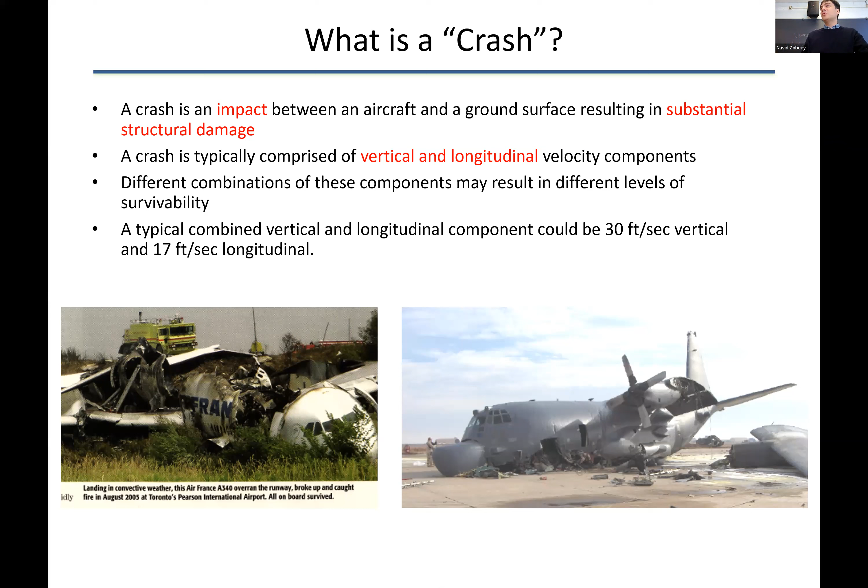So with that in mind, with the limitations that we're going to impose on the requirement, let's go through this. Any questions so far? Is it clear?

Okay, so there are 4 things that we have to guarantee. First of all, it's a system design, it's not about the material only. There are passengers, there are seats, there are cargoes, there is the entire system that we are designing for, and each of them would significantly change the behavior of the aircraft. So keep in mind, it's a system process.

In simulations, we simulate it like that. In testing, we test it like that. We have dummies and we have seats. So it's not just about composites and the fuselage, it's about everything.

And then we have to guarantee 4 things. First of all, retention of mass. It's not like we're gonna lose half of the aircraft and the other half is gonna survive. No, the mass has to survive within a threshold, number 1.

Second, you have to maintain a path for the passengers to exit the aircraft. So, for example, if the passenger floor collapses, it's not acceptable because then there's no path for the passengers to exit. So we have to make sure that floor beams survive.

Third, the survivable volume. So if the fuselage deforms significantly, it's not acceptable. Again, all of those things are for that very limited force we're going to apply: 30 feet per second vertical speed, 17 feet per second horizontal speed. So it's not a major load, but it is considerable.

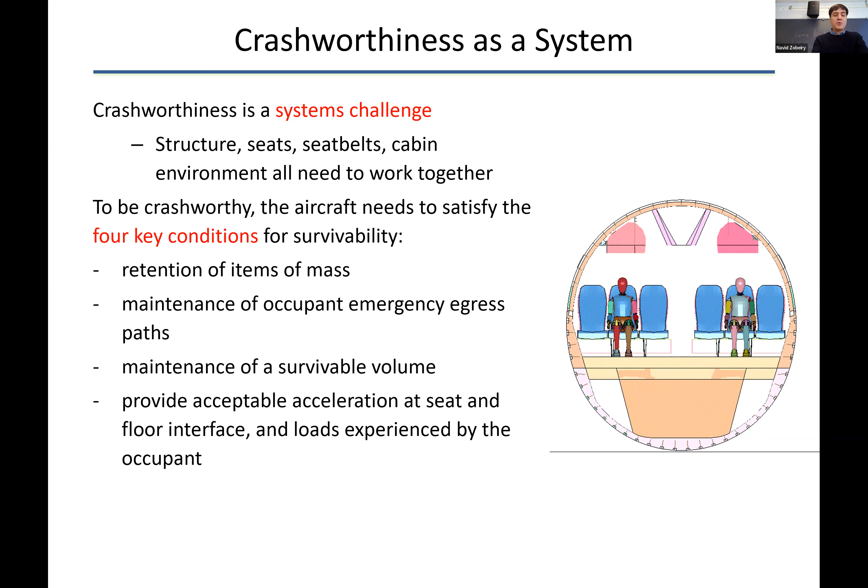So what are the limitations on a passenger? I'm going to talk about G-force, and then there's a force as well. When we feel positive G-force, that's like an aircraft accelerating, and we feel positive G-force. The blood goes toward our legs, and our brain might feel a bit dizzy, and then there's blackout if there's significant G-force.

Normal passengers, normal people like us, I think beyond 2G is a lot for us. We can handle maybe 2.5G, but not beyond that. Normal people, pilots, they can go to 9G if they have suits and training and all those things. But even beyond that, it's not acceptable.

Negative G is quite different. Negative G is when you, let's say, descend quite fast, and then all the blood goes to your head, and this causes redout, they call it. So the blood actually comes to your eyes and you can't see. I think there's a much lower limit, maybe 2G or 3G, even for pilots, trained pilots.

So negative G is quite bad. Positive G is still acceptable, or maybe with the suits, they can go beyond 2, 3G. But for commercial aircraft, so this is not like fighter jets, the passengers shouldn't experience those G limits.

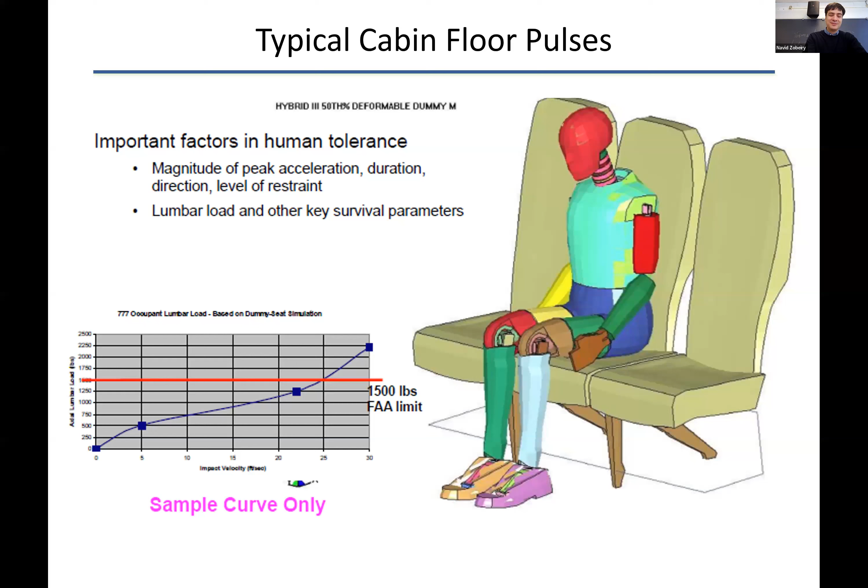The whole idea is to come up with a design to maximize the energy absorption of composites. Otherwise, they're not going to be good at absorbing the energy of the crash. So the subfloor survives for the cargo and the passengers, but you have sacrificial parts whose job is to absorb the energy of the impact. You know how much energy you have because you're designing it to 30 feet per second. It's not going to survive beyond that, but at least it's going to absorb some of the energy.

So what is the design? When the impact happens, you want these frames to rotate inward, and then the sinusoidal shaped components rotate inward as well and become vertical during the crash, so they can absorb the energy much better.

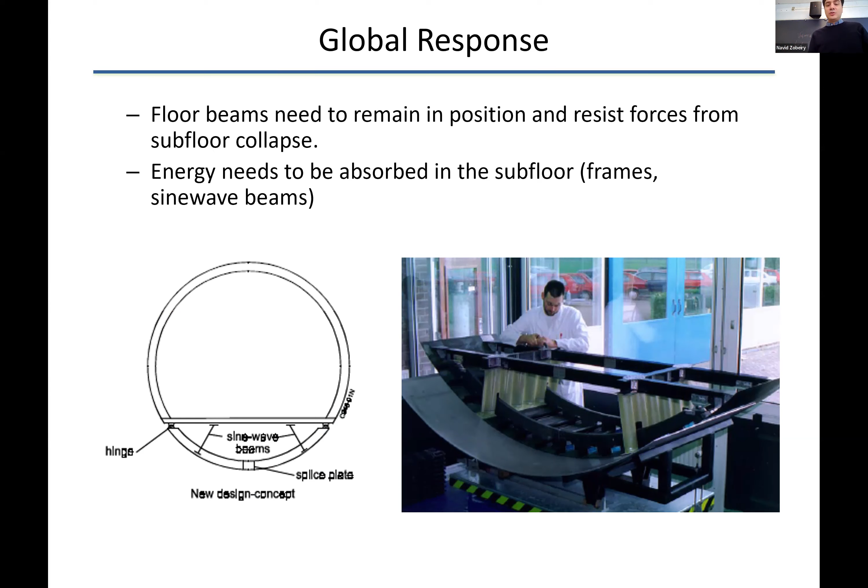You do that by designing this splice plate, which is going to fail in tension. It's an intentional weak point in the design - you know if a crash happens, it's going to fail. It's not going to fail in any other case, but the load of the crash would be enough to fail that splice, and then the beam bends inward after that.

Then you have these sinusoidal shaped components that are designed to maximize energy absorption, and the shape has a significant impact - we're going to talk about that. Is this clear so far?

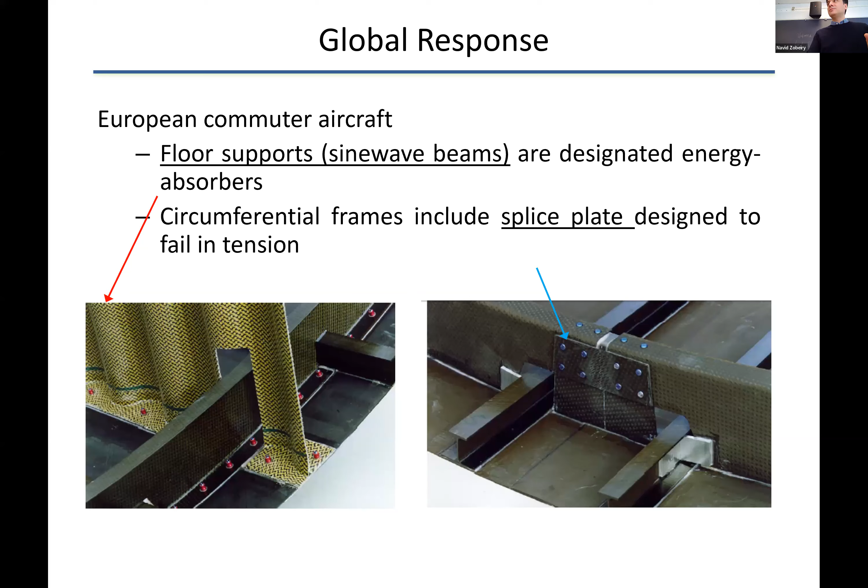I think this shows the scenario here. Again, you do this with cargo, maybe without cargo, so you have to consider different scenarios. Here is the passenger floor, and this is the cargo floor with the beams. You can see how the lower parts bend inward, and this one has multiple crash absorption components.

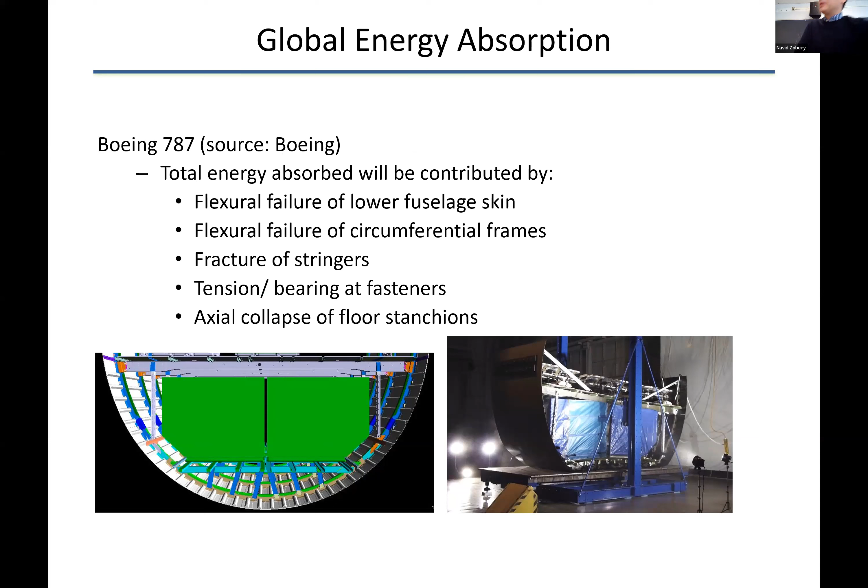If you have an aluminum tube, let's say a rectangular tube - for aluminum it doesn't matter that much, but rectangular becomes important for composites - and you start crushing it. The way you do tests is you secure it vertically, then drop a huge weight from, say, 10 meters or 15 meters or 5 meters, and that sets the energy of the impact.

If you're designing it properly, if this doesn't buckle—because it might buckle, and if it buckles, that's a different story, it's not going to absorb energy—if it doesn't buckle, it's going to create local plastic hinges. And then it will go through this and create multiple plastic hinges. Plastic hinge means it's absorbing energy.

Because basically, if you look at the stress strain curve, it goes through that yielding process, and the area below a stress strain curve becomes the amount of energy per volume that you're absorbing. So that's where you can take advantage of the material behavior. If it goes through yielding, better. Multiple of these you have, even better.

So a case like this is the best case scenario that you might have for a metallic tube. If you don't design it properly, it's gonna buckle. Then it only has one plastic hinge, and it's not maximizing the performance of that tube. So that's the idea behind metallic structures.

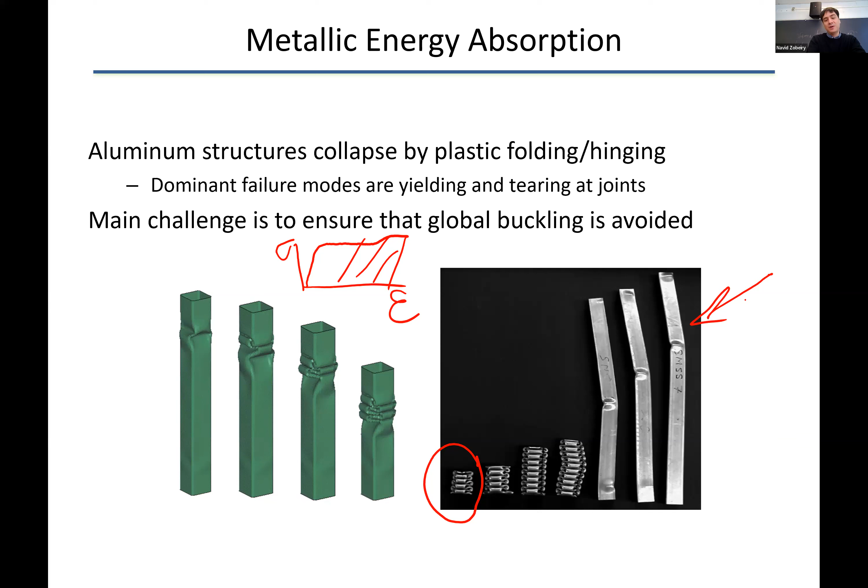So in the best case scenario, imagine that you're taking every fiber, and during crushing, you're breaking it over and over again. So you have a fiber that breaks—it doesn't buckle, it breaks under compression over and over again. That absorbs tons of energy. But sometimes the design is such that it doesn't do that.

I forgot the name of this failure mechanism. There's a name for this type of failure mechanism. Does anyone know? I forgot. Anyway, so it's a different amount of failure, as you can see, energy-wise.

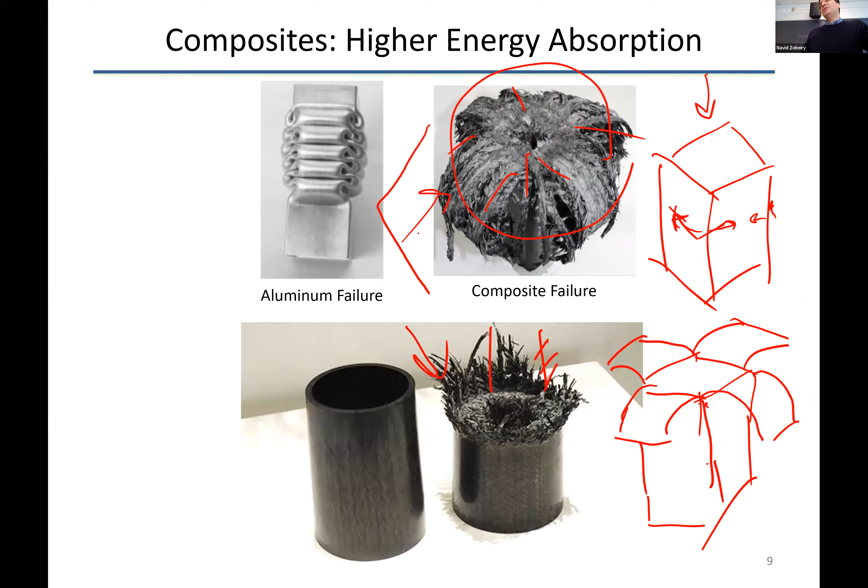So the main thing that we measure—it's a very messy process, as you can see. I mean, how do you measure this? When I was a PhD student, we had to simulate this, and it's a nightmare to simulate something like this, right? So there is one parameter that you look for in the performance of any component.

That is called specific energy absorption. You do a test, you plot force versus displacement, and then the area below the curve becomes how much energy was absorbed, and then you divide it by the mass that was crushed. So it's energy absorbed per unit mass of crushed material, kilojoules per kilogram, for example.

So first of all, if you're comparing aluminum and steel with composites, you're dividing it by mass, so the density of composite is lower, so it's to their advantage. But kilogram to kilogram, which one is better? Because for flying, it's better to have lighter components that absorb energy more.

So if you have a metallic component like steel, and we're talking about circular, it can absorb 10 to 17 kilojoules per kilogram. And again, steel is quite heavy. If you replace it with aluminum, you will increase it to 15 to 25 kilojoules per kilogram. If you have short fiber composites, so not long fibers, chopped short fibers, it's pretty low—probably comparable to aluminum.

But this is where it gets quite interesting. If you have composites with long fibers parallel to the crushing load, then they can absorb a lot more energy compared to metals, right?

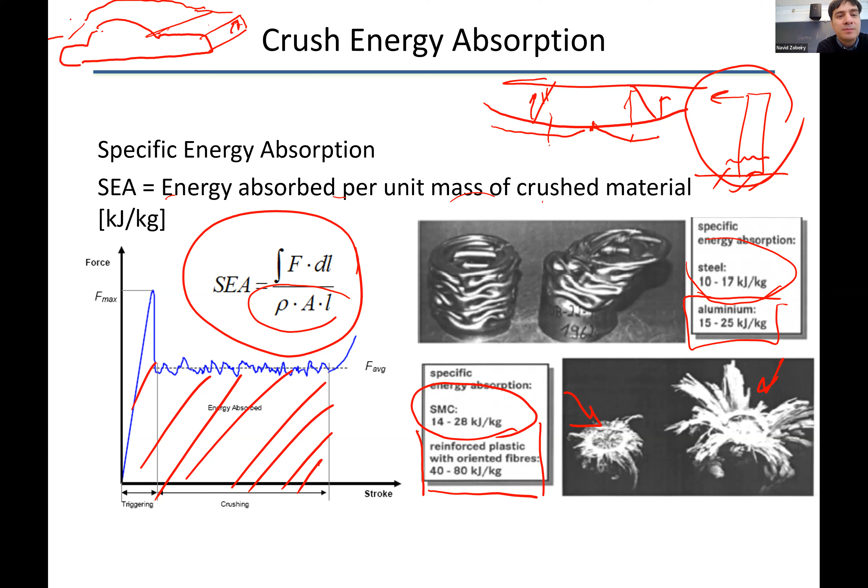So about ten years ago, everyone started doing research on creating crushing components for the automotive industry. Excuse my drawing, but let's say this is a car—let's look at the design here. The idea was to install these tubes, two of them, and in a crash scenario those tubes would absorb a lot of energy.

So for a front impact, this would protect the passengers. The problem is, how do you know the load comes exactly parallel to those tubes? It might come from another direction, and suddenly they don't absorb much energy. I remember at that time we were doing projects with Honda, Toyota, Ford—everyone was spending millions of dollars to design proper tubes because they wanted to reduce the weight of the car. That was before electrification and Tesla and all of those things.

After ten years, they realized it might not work because you never know which direction the load comes from. So in newer designs they replaced it back with aluminum, from what I can see. We are not using composites to absorb impact energy in the automotive industry at the moment. But for aerospace, yes, we do this—we just have to design it so the components align themselves with the crash.

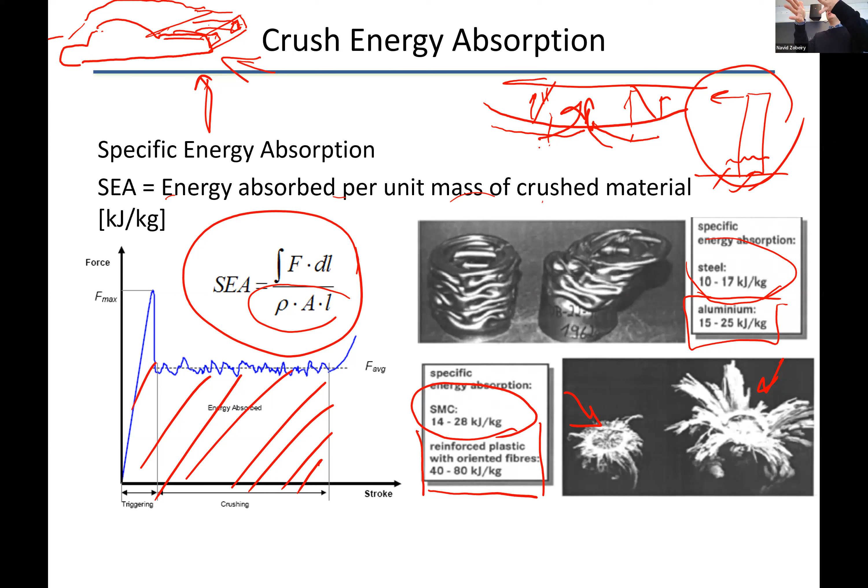Then people started doing a lot of tests—many done by Professor Dan Adams at the University of Utah. He tested different shapes of these tubes. And it's not just the shape; how you do the tests matters a lot too, including the boundary conditions.

People also realized that flat top surfaces versus tapered edges have a huge impact. I don't know if you can see it, but it's tapered at the edge. Without these tapered ends, it might become difficult to get good measurements.

There are lots of details in the testing, but they realized that changing the design changes the energy absorption capability significantly. With a tube, the energy absorbed is around 40 kilojoules per kilogram—still much higher than aluminum or steel. With a corner design, one corner still fails in tension and the other component starts bending, but it's still better than a plain tube, increasing the energy to around 50 to 60.

The best case scenario is a shape like this, which has no sharp corner to break, so everything goes to bending and you start crushing the whole structure. This can increase the energy absorbed to around 80 kilojoules per kilogram. So the design has a significant impact on how much energy you can absorb.

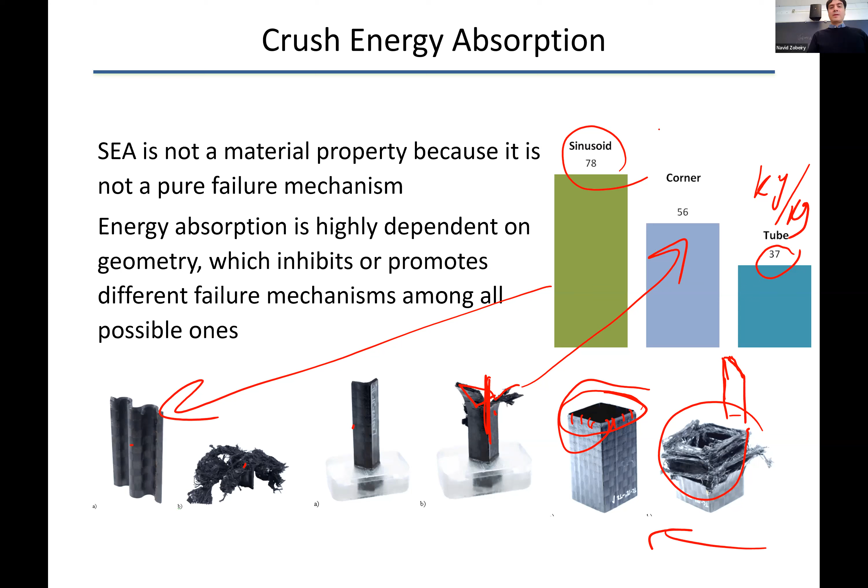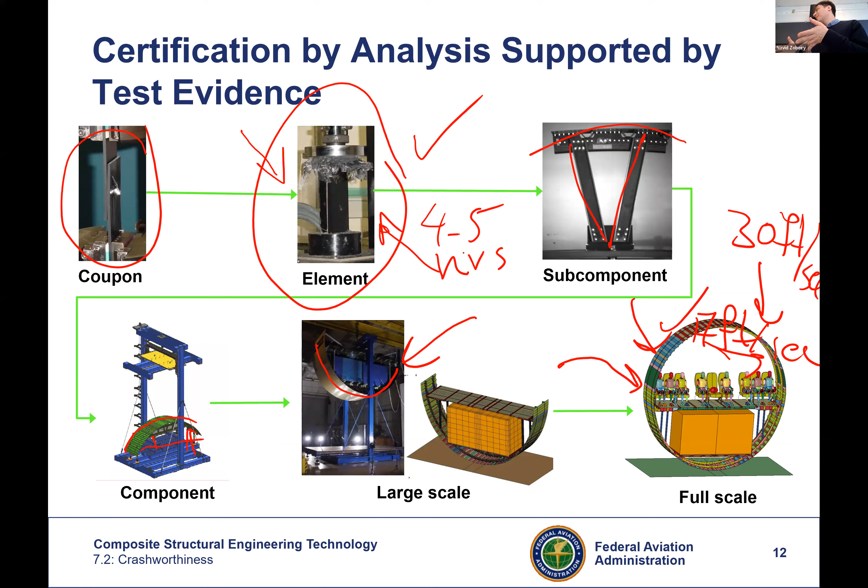So you rely on something called explicit simulation. Explicit simulation goes to extremely tiny time scales, 10 to the minus 6 seconds, 10 to the minus 7 seconds, and does Newtonian calculation at that scale, then adds to the next time step. It becomes an extremely long process to simulate, and the shorter the time scale, the more accurate it becomes.

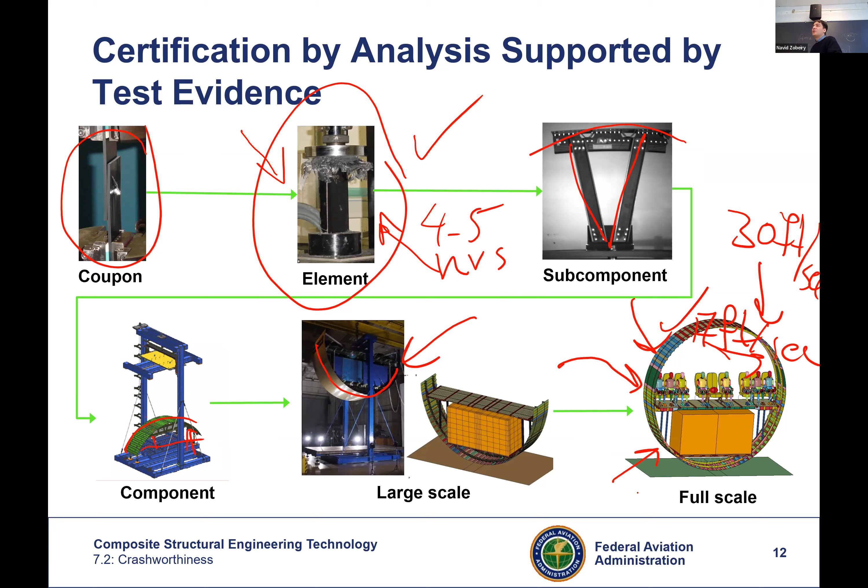So it works, let's say, for 4 to 5 hours. If you want to simulate this thing using that method, it's just going to be months before you get any simulation results. So it might be cheaper just to do tests at that point.

So people have developed different approaches. You can see one of them here, which they call macro elements. You put these beams together, which isn't exactly like the real structure - it's more like a representation of it. That helps you understand the behavior of an actual aircraft.

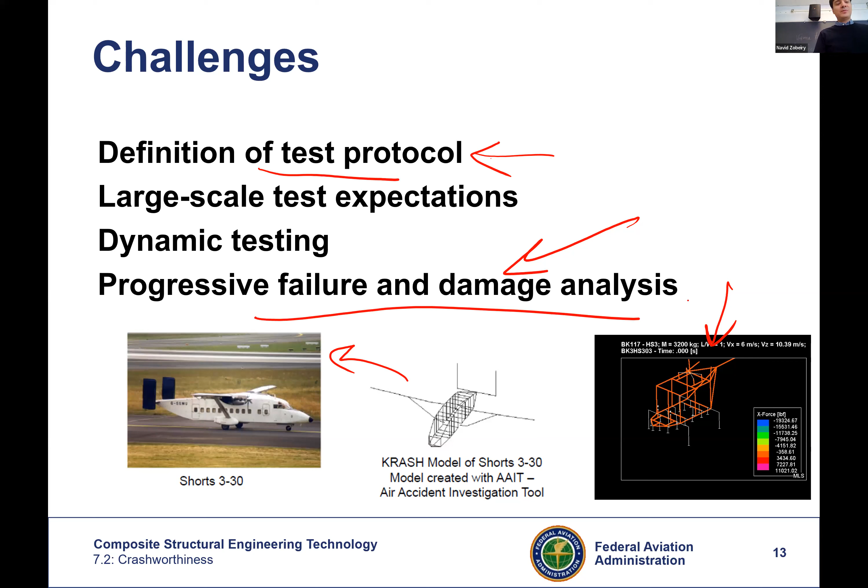But there is a problem - what are the problems? Testing at larger scale is very difficult, and simulation is also very difficult. So at larger scale, we have challenges for both test and simulation, which adds more complexity to the certification problem.

Okay, let's move on to fire safety.

So first of all, there is this viewpoint that composites are not safe compared to metals in a fire scenario. What are the fire scenarios? In-flight fire, post-crash fire, or the gas tank fire. So there are 3 scenarios, and you have to design the aircraft for all 3. That's a true assumption if you're not careful with the design.

But since that perception exists, the FAA has gone the other way. It says that in all of these things, you have to show that your design is better than an aluminum design. So that's this extra safety factor. So God forbid, in the case of fire, it's actually safer to be inside a composite aircraft than a metallic aircraft, just because of that extra safety factor that the FAA mandates designers to show. So how do we show them? Let's go through some of the details.

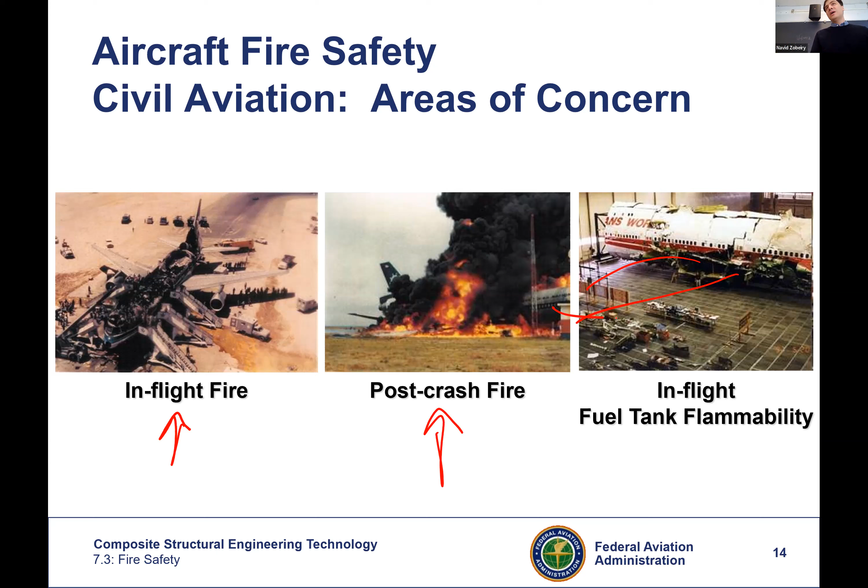For each of these 3 fires: for in-flight fire, you have to prevent propagation of the fire. For post-crash fire, you have to have enough time for passengers to leave the aircraft, around 1 minute. So you have to show that the aircraft's structure survives the fire, and that 1 minute lets the passengers leave. You show that typically through simulation. And then reduced vapor flammability, that's the other thing you have to show for the wing.

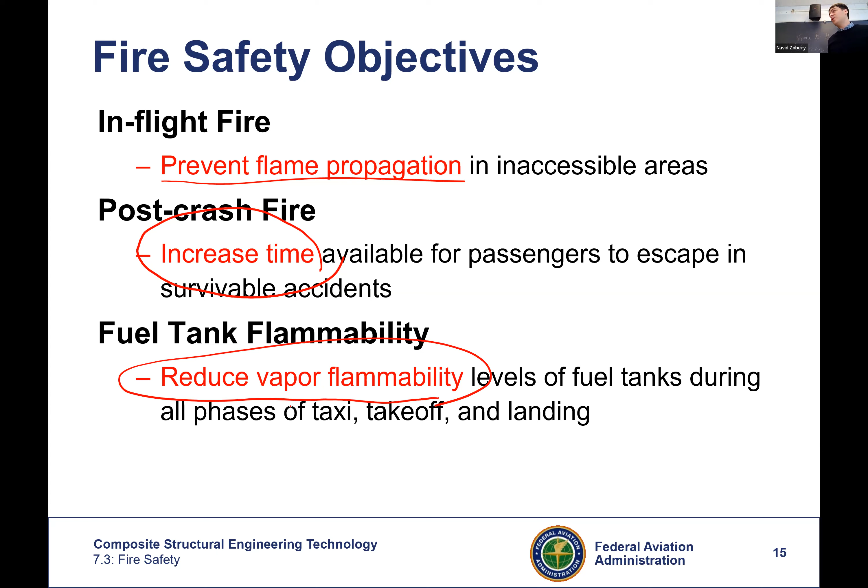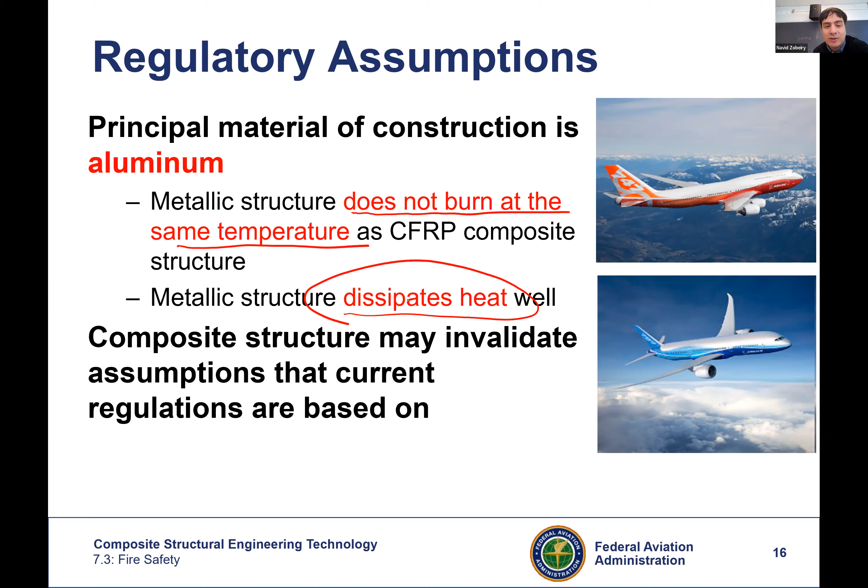So I mentioned this before, aluminum seems to be safer. For example, in a metallic structure, it doesn't burn at the same temperature as composites. Composite is going to burn at lower temperatures. And metallics are better at dissipating heat because they have much higher thermal conductivity. So as a result... oh sorry, there was one more thing I think I mentioned.

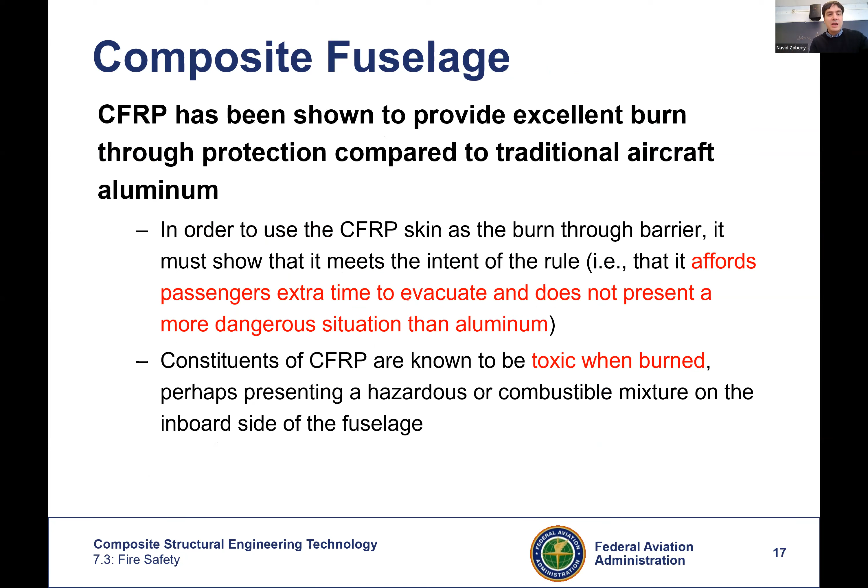Where's the FAA thing that I wanted to mention? Did I put the FAA statement in? I think I didn't put it somewhere... oh yes, here, okay sorry. That's the FAA statement. It says we must demonstrate that these materials are at least as safe as aluminum when you're designing. So that's the mindset.

So how do we do that? We're going to come up with some tests. We're going to measure what toxic materials are released, how fast the fire is going to propagate into the material, and how long they can survive. So we check all of those things.

Out of all of these things, we have changed the formulation of the material, not just for the fuselage interior materials. So you have to look at everything - what you cover the seats with, the interior decorations, but also the structural components. And then coming up with tests.

So for example, this is one of the tests, a larger scale test. You get a section of the fuselage - I think this is from a Boeing 707 fuselage. And then you put metallic sheets around it to create an exposure area to heat, and there's this pan that will create a large fire in it. In this case, it's 55 gallons of jet fuel. And this is basically resembling the wing catching fire.

And then you look at how long it takes for this thing to survive, and also what comes out of it on the interior, how much the temperature rises, and whether you have that 1 minute at the end of the day to survive or not, so the passengers can leave. So that would be the test version.

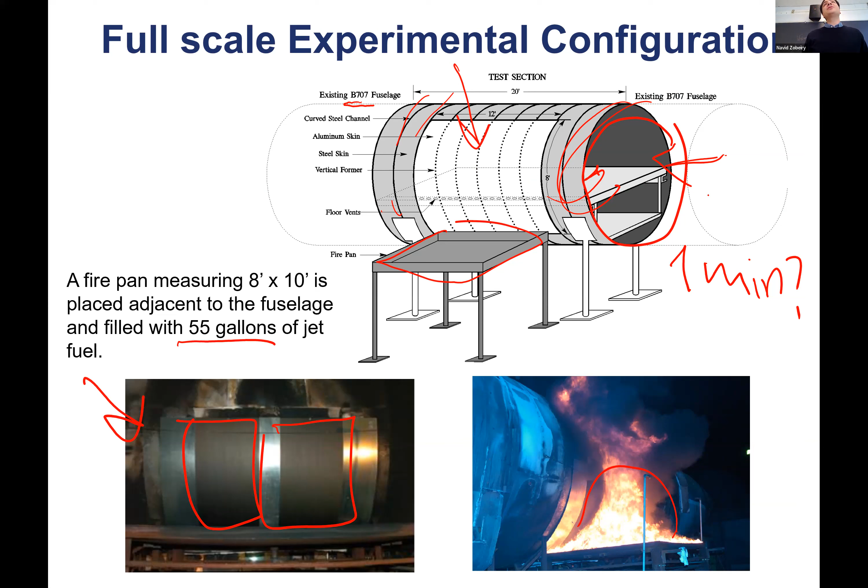So it limits the formulation that you can use for composites. There's a lot of innovation in the resin formulation to survive fire, or to have fire retardant material additives added to the composite formulation.

So there was an accident in 1996 where we can see the wing is gone now. There was an explosion on the wing, and it was not a composite wing. Was it a composite wing? I can't remember, no, it was not a composite wing.

But there were lots of lessons learned, and FAA came up with a solution for composite wings eventually. That is, on every aircraft there should be an inert gas generator system. So if you don't have that, when you start using the fuel and you have a half-full gas tank, you'll end up with fuel vapor. Fuel vapor, composite, sparks, you will have fire. To prevent that, you pump nitrogen into the gas tank continuously, and that inert gas prevents the fuel vapor buildup. So on every 787 aircraft, or other composite aircraft, there is one of these nitrogen generators.

I'm gonna move on to lightning strike, which for me is the most interesting topic. I'll explain why, but any questions?

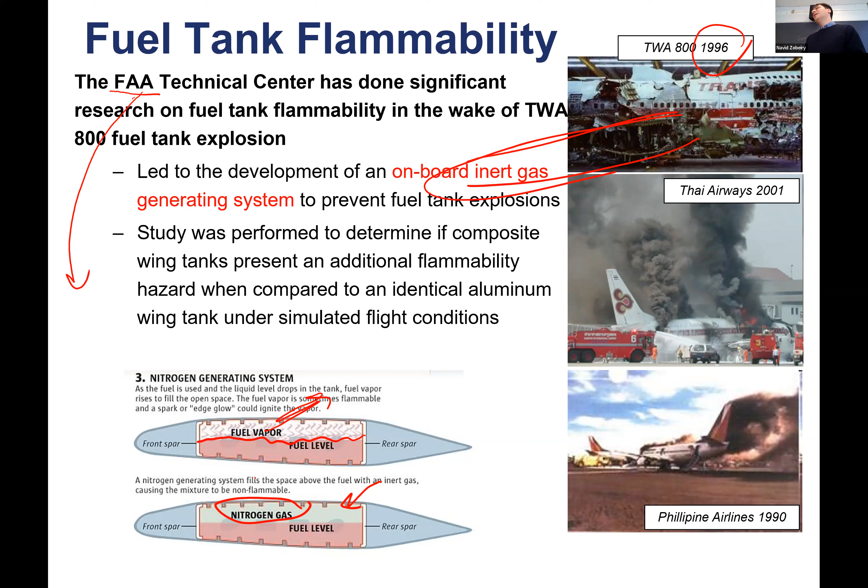I don't know if they're going to build the exact same thing out of aluminum. Maybe in simulation you can show that, but also for the material itself, the kind of test you can do at the lower level, you can test them on metals and composites as well. But this talks about materials, not about the design. The design itself, I know you have to show that the fuselage would survive longer than an aluminum fuselage. I think that makes the design quite thick and heavy as well, so it's an additional safety factor on top of all the other safety factors we've had so far.

Are they like aluminum frames, or is that a new thing they have to develop? No, they don't need to develop new things either. Yeah, that would be too much expense.

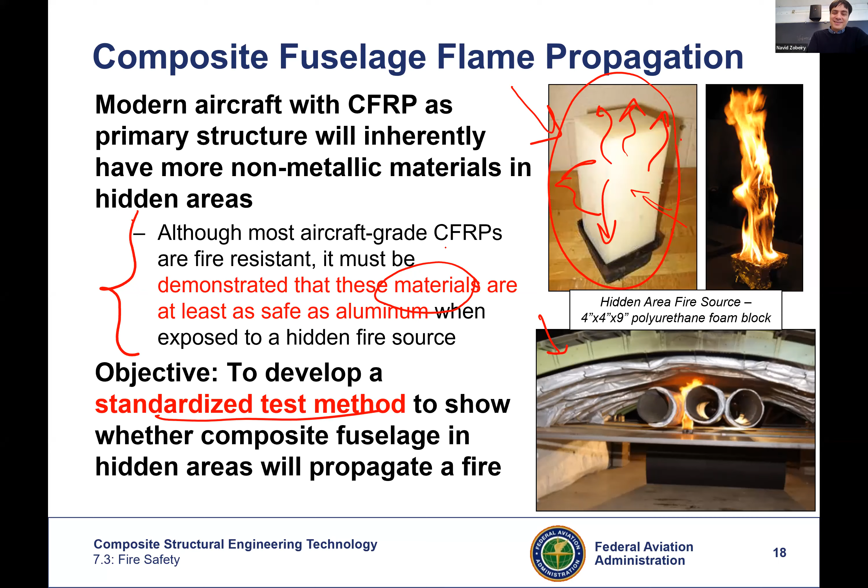Okay, so lightning strike. Every year, every aircraft would experience one lightning strike on average, that's the statistical measurement. If you have a metallic structure, the energy comes in, and metals are quite good conductors, they disperse the energy, so nothing happens to the structure. But composites, on the other hand, carbon fiber, is a good electrical conductor compared to resin, but aluminum is 1,000 times better than carbon fiber. So the energy of the lightning strike comes in, it doesn't have enough time or enough pathway to get dissipated, it gets absorbed in that location, and it's going to burn through the composite.

If it's carbon fiber, or if it's glass fiber, which is not conductive at all, it's going to puncture through the material. Worst case scenario, that puncture is so fast that you might end up with pressure buildup below the surface, and that will lead to explosion. So carbon fiber, glass fiber, metals—metals are 1,000 times more conductive than carbon fiber, but carbon fiber is still by far better than glass fiber. And resin is not conductive at all.

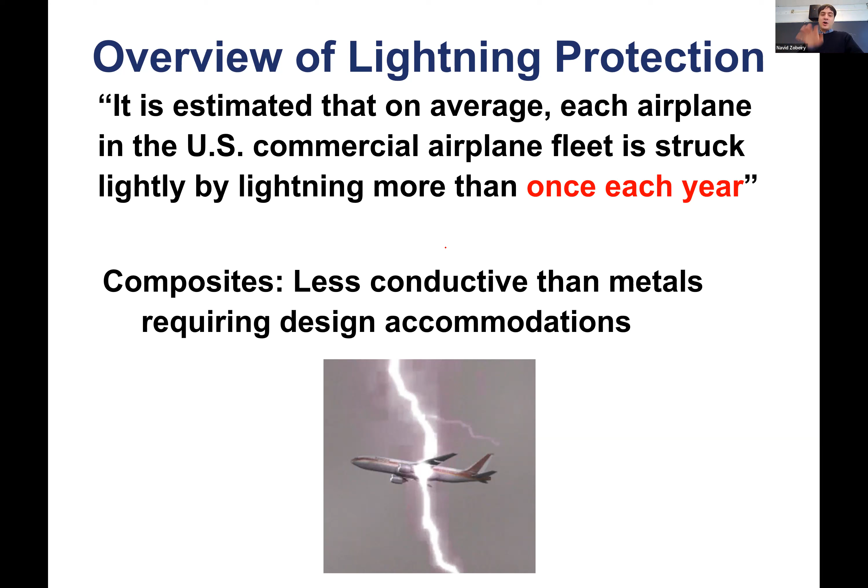And there are some requirements for what you have to show. What you have to prevent is spark. If there's any spark, especially near the gas tank, you will get fire. So in any of these tests, you make a design, you do a lightning strike test, and there are special cameras that can record if there was any spark or not, in microsecond detail. If there is any spark, that's an invalidated design. So I'm going to talk about where sparks might appear and how we do this test.

But here is a typical scenario: a composite which was unprotected, let's say. Lightning strike comes in, energy builds up locally, and in this case it's carbon fiber, so it's going to dissipate the energy a bit, but it's going to damage the part. If it was glass fiber, it would be a very different story—it will just puncture through it.

Keep in mind, this is going to happen every year. So you cannot have this on an aircraft as a damage.

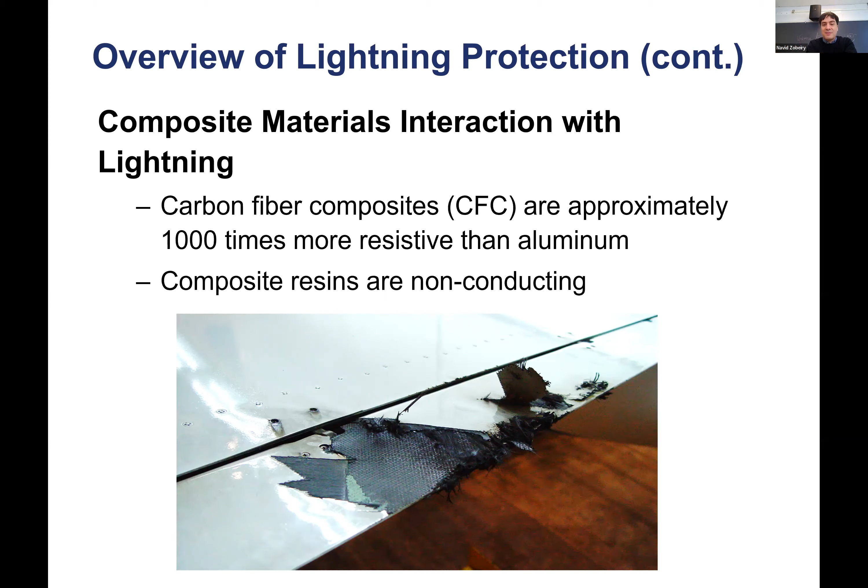Here, I think is the same scenario, aluminum versus composites, and this is unprotected carbon fiber composite. I'm going to talk about protection. This becomes quite small compared to damage that you see here.

You probably don't see it, but there's resin burn off, resin goes through pyrolysis. There is probably delamination, and you're going to probably break the fibers. The extent of damage is probably a lot more extensive than you can see in this corner, but this corner is probably completely gone because of the temperature that is experienced.

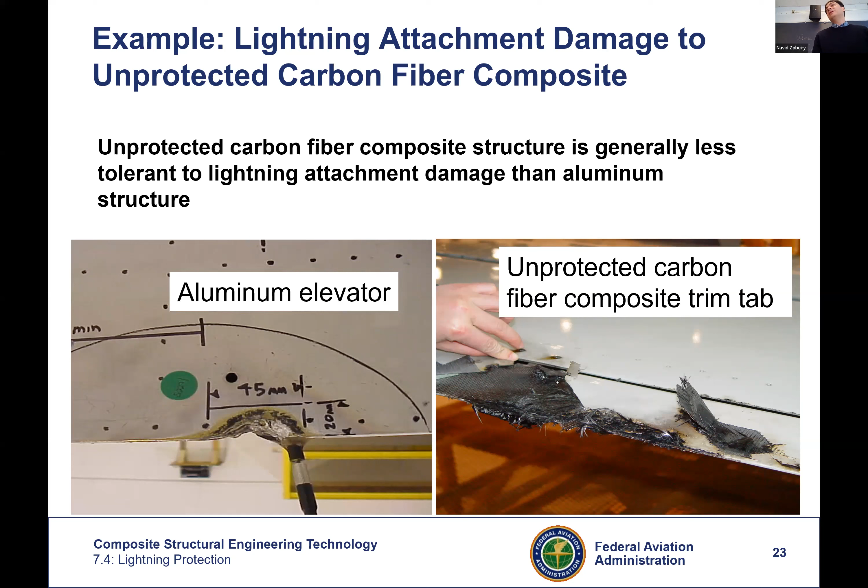That metal layer's job is only to dissipate the energy from critical locations. So we'll come up with different strategies to do this.

This area of how you create protection against lightning strike is one of the heavily guarded in terms of IP. It's not in public domain at all, many of the details of how they're doing it. There's some insight, which I'm going to go through. There's some information in public domain, but it's a closely guarded secret of how this is achieved.

Most of it is from the material design perspective. How do you design specific layers that can handle the lightning strike? We have some information which I will share with you. But again, this is one of those exciting areas which unfortunately is all done typically within companies.

So if any of you get hired by, let's say, Boeing, the next day you can go and look up those secret documents, and you will have a lot more information than I have to share with you now. So keep that in mind. I'm going to share with you what I've learned from public literature, and I don't know the secret sauce of what's actually happening behind the curtain.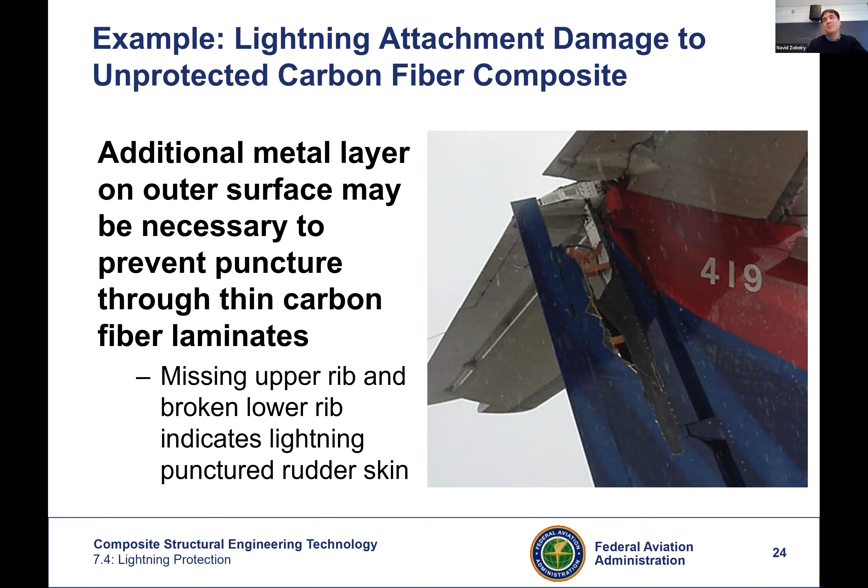Okay, let's talk about this. So there's a couple of scenarios I'm going to go through.

What are your knobs? First of all, you have to minimize lightning damage at critical locations, so we're going to learn how we can do that. You definitely have to prevent puncture through the composites, so you have to dissipate energy in the area where there is possibility of puncture. You might add metals on the outer surface in some cases.

But this second one is the most interesting one, which I'm going to talk about, because I have seen it in almost every composite aircraft. That is adding a copper or bronze mesh or foil on the outer surface. I'm going to talk about it in a second.

Conducting paints don't work, that far I know. There are people that do research and come up with adding metal components into, I don't know, resin paints, and it doesn't work in dissipating the energy. It's not as effective as a continuous metal.

And this is quite critical, but also very subtle: electrically bonding structural parts, and it's very difficult to actually prove that. I'm going to show you why and where it becomes quite important.

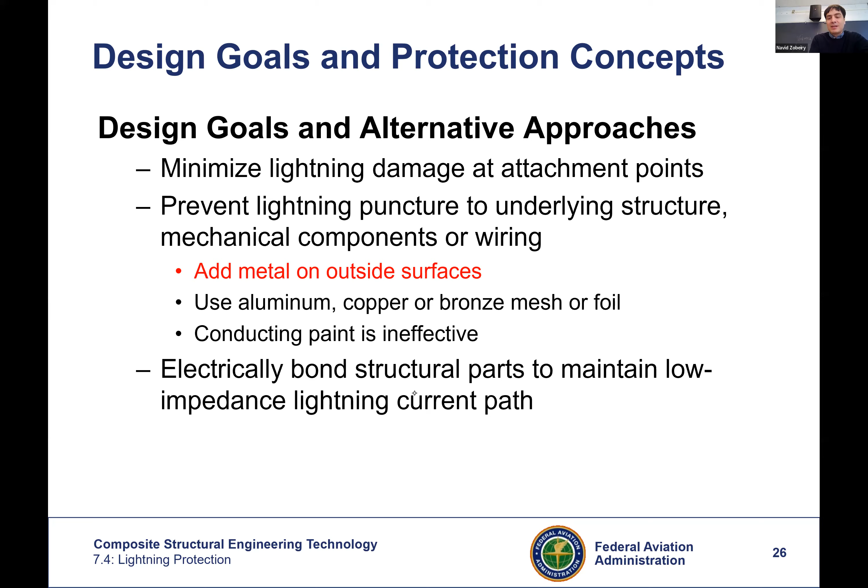Think about this detail. Let's say this is your gas tank, so this is the U-shaped spar. There's a top skin and bottom skin, and this eventually becomes your wing. So you have to connect this U-shaped spar to the skins with fasteners. This would be the outer surface where the lightning strike occurs. So here is your gas tank, and here is the lightning strike.

How do you protect this extremely sensitive structure? First of all, you would put a layer of metallic mesh on the outer surface, and I'm going to show you a design of that. That dissipates the energy.

There is this law, I forgot the name, that when the lightning strike happens, the electrons are mostly gathered on the surface. As you go through the thickness, they exponentially become less and less. They don't dissipate, but if you absorb most of the energy on the surface, it's quite good. It's not like we are leaving a lot of energy to go inside the material. So let's say we are absorbing, I don't know, 90% of the energy.

The fastener itself is conductive, so you have to use metallic fasteners, and that becomes a way for energy to go toward the gas tank. So you will prevent that by putting a layer of, let's say, glass fiber, which is not conductive, under the fastener. Then you cover the surface with non-conductive paints, like epoxy. Every corner you can find, you do that. You put this putty material, like epoxy with additives, and it protects those surfaces.

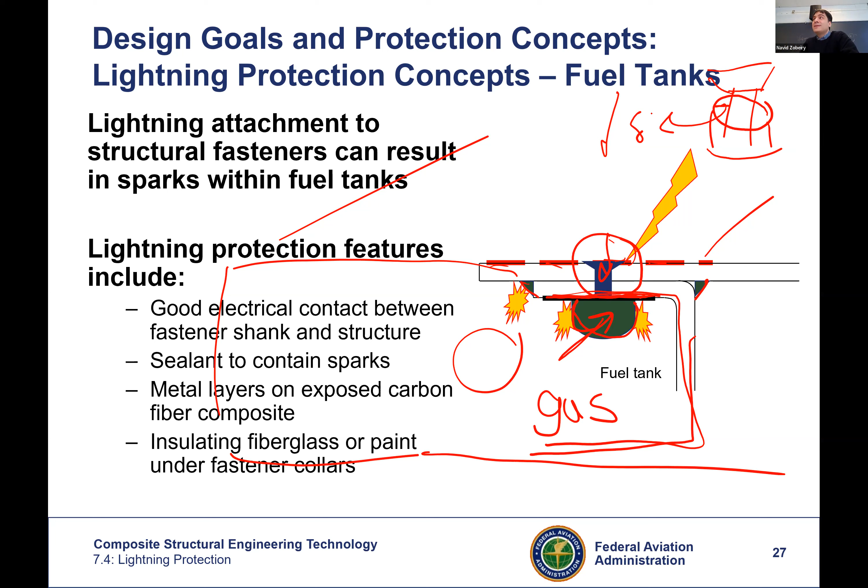But that gap becomes quite tricky, and it goes back to the design. You drill into composites and put the fasteners inside. If there's any gap there, you'll get sparks. So the drilling design is quite key. There's a limit, I forget exactly, but you have to make sure the gaps are not within a certain threshold or you will get sparks. So that kind of guarantees your fastener design is good, but the quality of drilling becomes quite important as well.

So what I've seen is that they make coupons representing the bonding points, let's say multiple fasteners, and take them to the lab to test with a fake lightning strike. If there are any sparks in any of the fasteners, that means the design didn't certify, so they go back and redesign it. The number of fasteners, their spacing, all of that becomes key. You have to guarantee energy comes in, gets dispersed around the fasteners, doesn't go toward the gas tank, and doesn't create any sparks. It's a very detailed design, and most of it is trade secret.

What I'm sharing with you is in the public domain. Any questions?

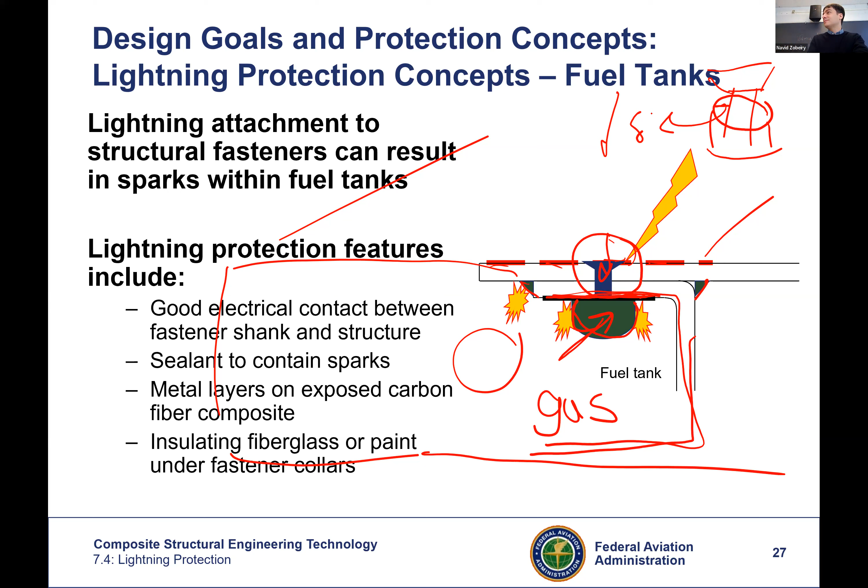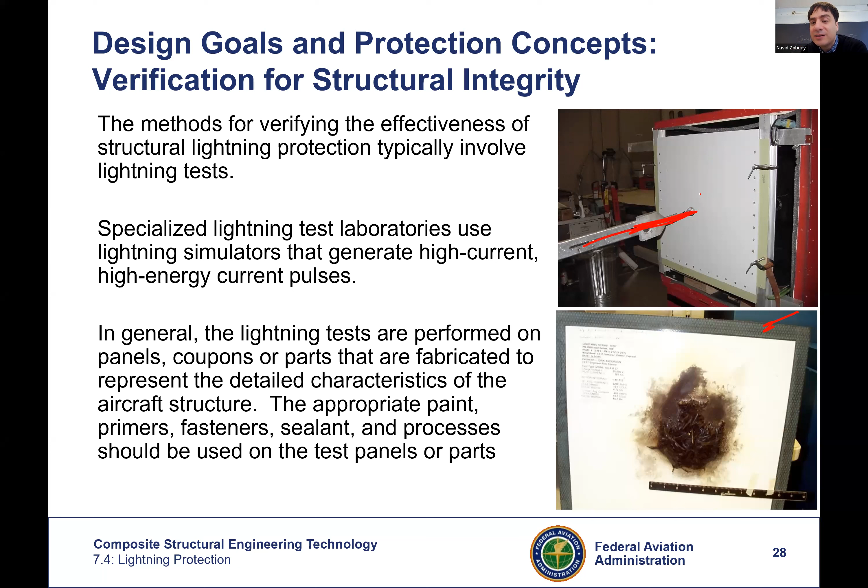So this is the type of test that I could find online, at least. It's a composite plate, and you integrate your design on top of that - the paints, the foil to dissipate energy, the fasteners, all integrated into it. Then this rod basically creates a lightning strike on the surface. You measure the amount of energy that goes into it, you measure the amount of damage, and you measure if there's any sparks - that's the outcome of the test.

There are special cameras that can record sparks, and there's a threshold - if they record any red light beyond a certain level, that means there was a spark, so it kind of disproves the design. It's not someone standing there saying 'oh, it's a spark or not a spark' - it's all digitally done.

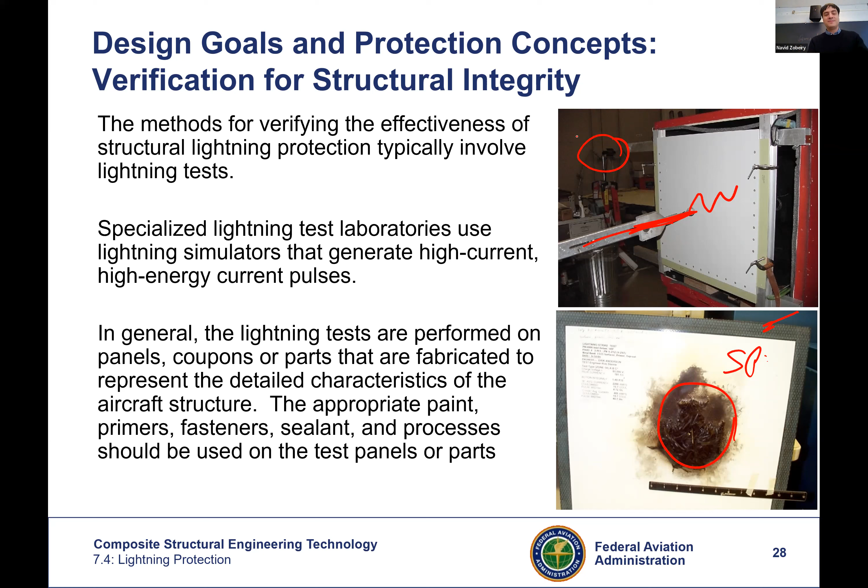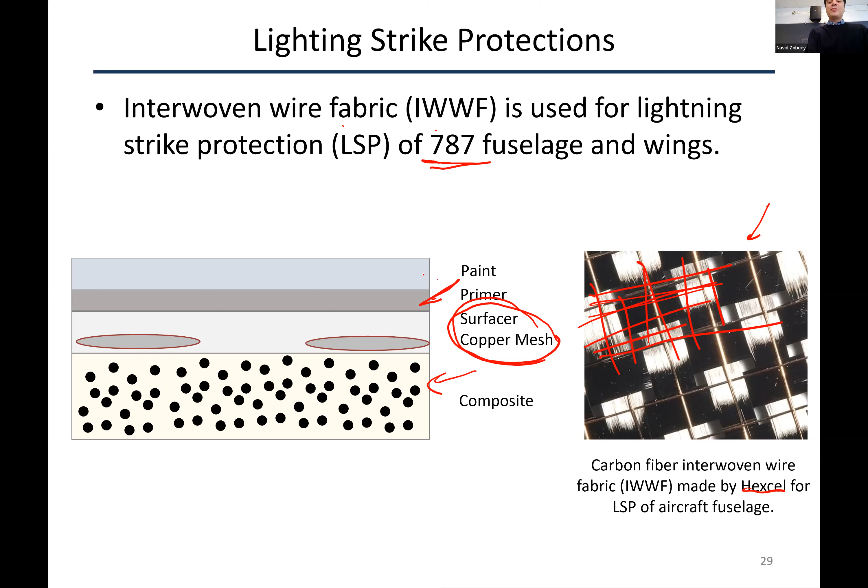Sometimes I've seen them put one layer of glass fiber, maybe under this - I can't remember. It could also be for surface finish. I can't remember now where it goes, on top or where. Anyway, there could be a layer of glass fiber added to this list. And this paint and primer are also UV protectors, so UV protection comes from the paint and primer, and this copper mesh protects against lightning strike.

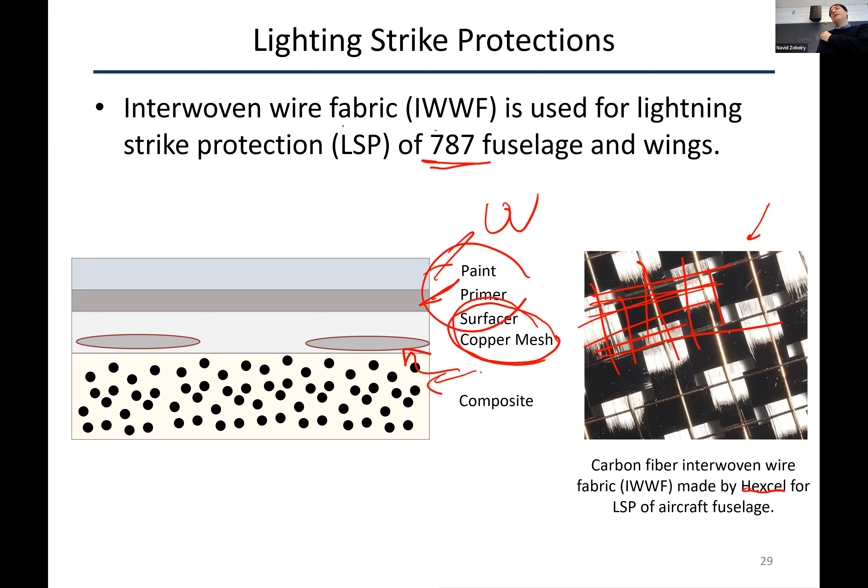And here is finally the entire design of 787 for lightning strike. This metal mesh is embedded on the top surfaces of the aircraft everywhere, on the wings and on the fuselage. You can see, hopefully that's more clear, that metal mesh.

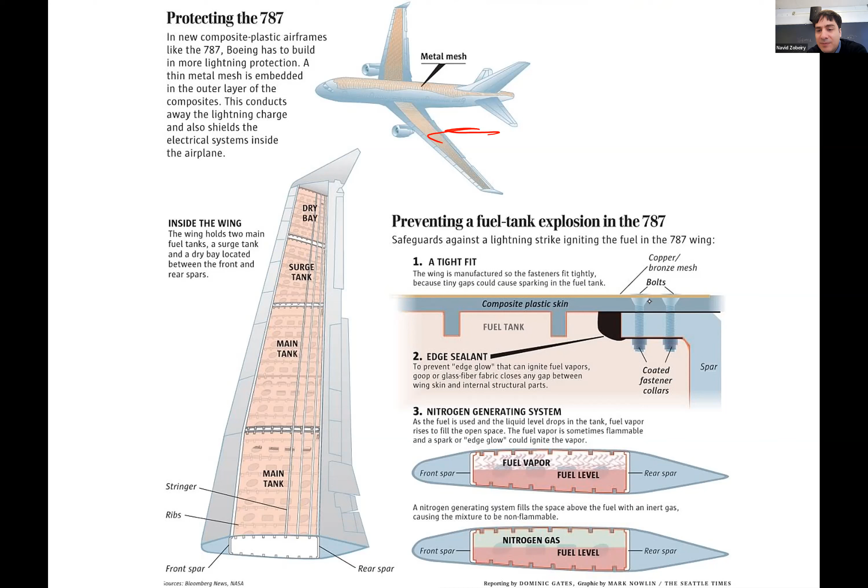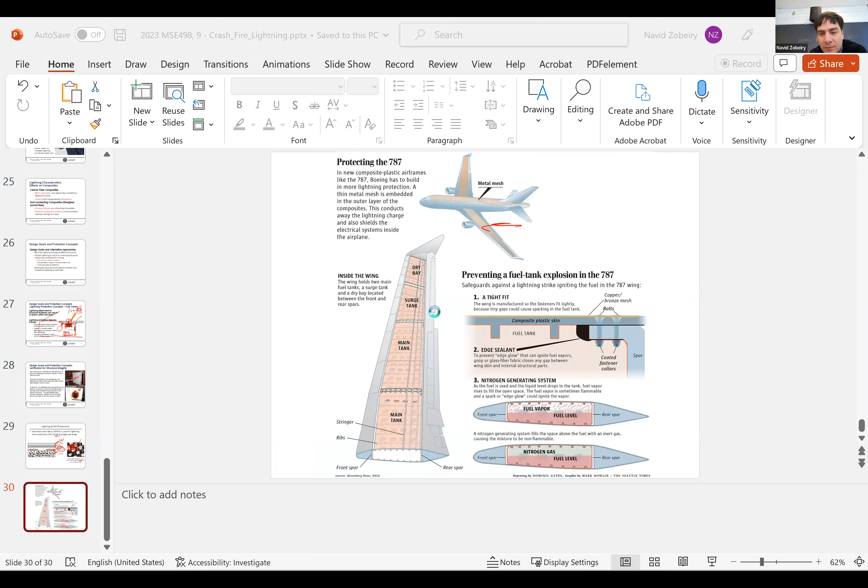Then this is a design that I mentioned. These are, so this is copper/bronze mesh. That's the edge sealant that I mentioned to make sure there is no gaps for sparks. These are coated fasteners. In addition to that, you have this nitrogen generator that pumps in inert gas.

So there are three strategies if you think about it. There's tight fits, making sure there's no spark formation. Any gaps that you see, you will do sealants. You will embed this metal mesh, and you have the nitrogen generator. So all of these are there to guarantee that you can distribute the energy of the lightning strike and protect the gas tank.

Any questions? Yes. So it seems to me that they're really trying to anticipate a lightning strike happening to the gas tank, since that could lead to an explosion. I'm wondering if they also try to mitigate the likelihood of a lightning strike hitting the wings or the gas tanks by having essentially a lightning rod or something elsewhere. So somehow you have to guide the energy toward that point, right? It might not happen, so I don't know if I've seen it or not. Maybe it is, but it's probably not the main design aspect.

So these are what you will do: protect the wing with all these details, put the metal mesh on all other surfaces that might experience a lightning strike. I don't know if they put it under the aircraft or just on the top surface, I'm not aware of that. Then in very critical locations, let's say the joints that I showed you, you will put metal plates, not metal mesh. So you put like thick metal plates, and that guarantees that the energy just gets dispersed quite fast. So you don't even rely on the metal foil, you will put a proper metal joint cover for the top surface.